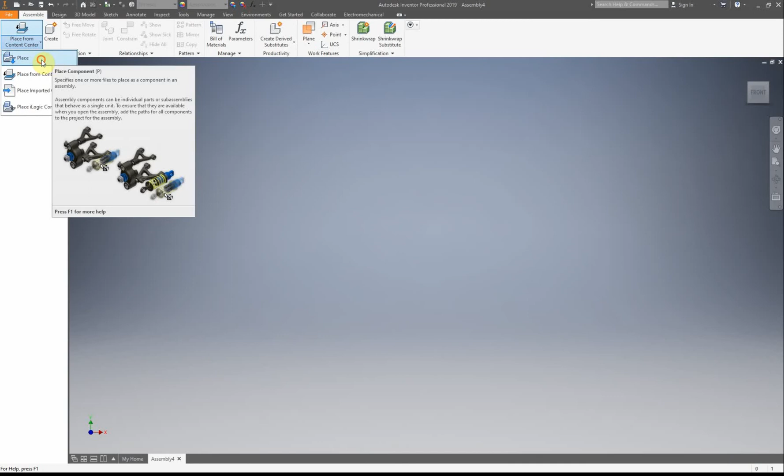Then you're going to find where you have your files. I have mine right here, so you can bring in your pieces. I'm just going to bring in the train body first. So I'm going to open, I'm going to place it in. And then I'm going to right click, OK.

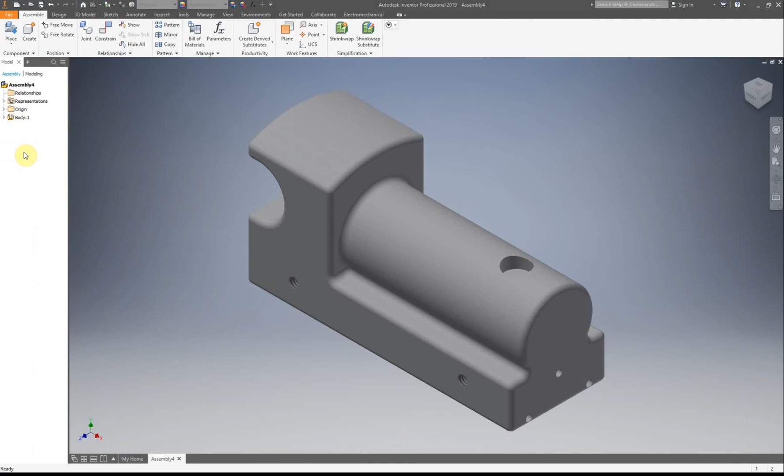The reason why I do that is if I click anywhere else, I'm going to place a duplicate. So before I have anything else in here, just so I don't make a mistake, I'm going to right click on it and ground it. What that does is if we look over here at our assembly, we can see that the train body, or whatever you called your file for it, should have a little tiny pin in the cube. So we're going to go to place.

Let's see, axle peg, we'll do that one next. I should have 4 of them. I'm kind of placing them where they're roughly going to go, just to make life a little bit easier when we're assembling. Okay, so right click, OK.

I'm going to go to place, bring in the next piece, cow catcher. Only need 1 of those.

So place, let's see, hitch magnet is my next one. Alright, I only need 1.

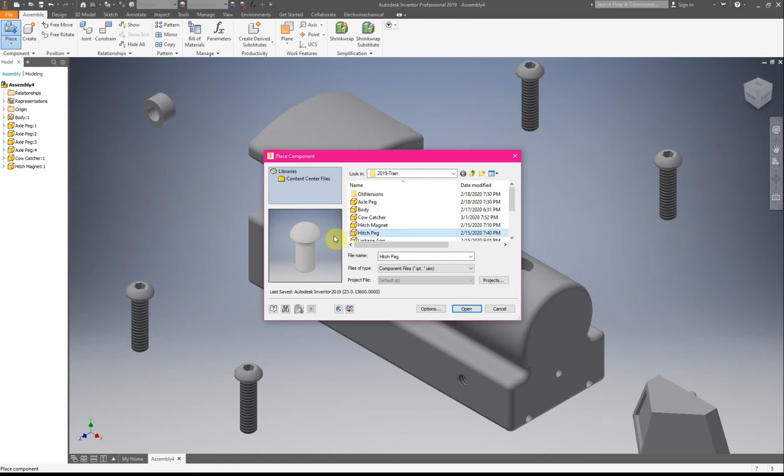Oh, okay, so you don't have to actually right click in there, okay. You can just click on place again. That's a neat update. Click open.

We only need 1 of the hitch peg. Make sure it looks like this. If it's the really tiny one, that's the linkage peg. So linkage arm, I need 2 of those.

Let's see, what's my next piece? Oh, there's the linkage peg I was talking about. See how tiny it is in comparison? So putting 2 over here, 2 over here.

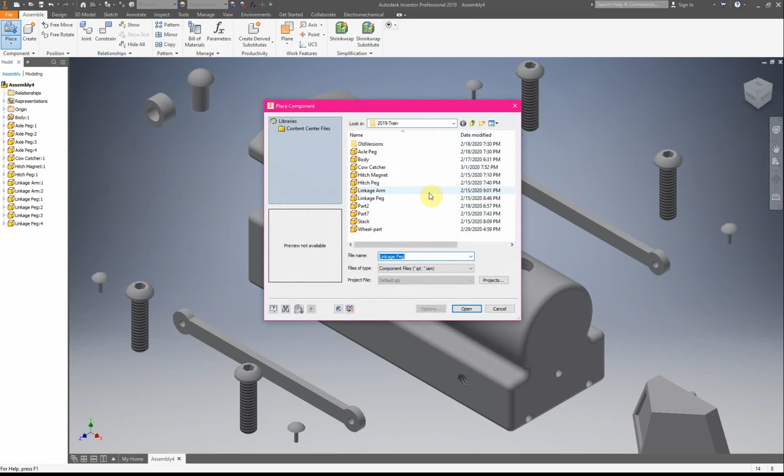Alright, let's see, stack. It's gonna go right here, but it doesn't look like it right now. And wheel, placing in 4 of those. Right click OK.

Let's see, do we have all the pieces? There should be 9 different pieces. So let's see, 1, 2, 3, 4, 5, 6, 7, 8, 9. Yep, looks like I got everything.

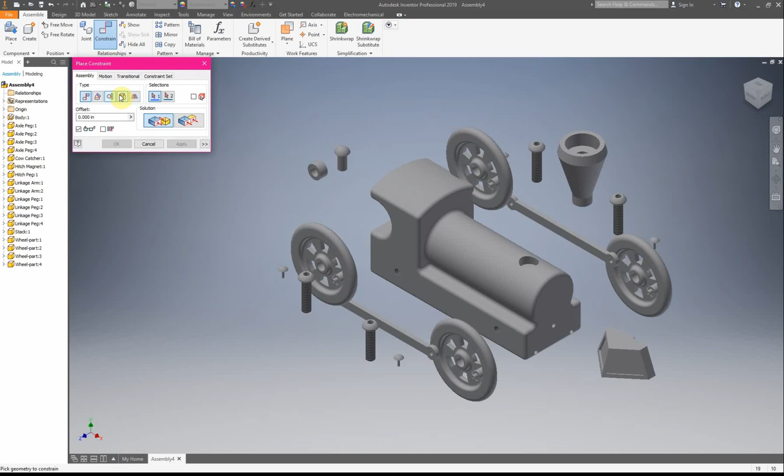Alright, so what we're going to do is click on Constraint. We have a few different options for this. This one right here is Insert. That's the one we're going to be using for like 99% of what we're doing today.

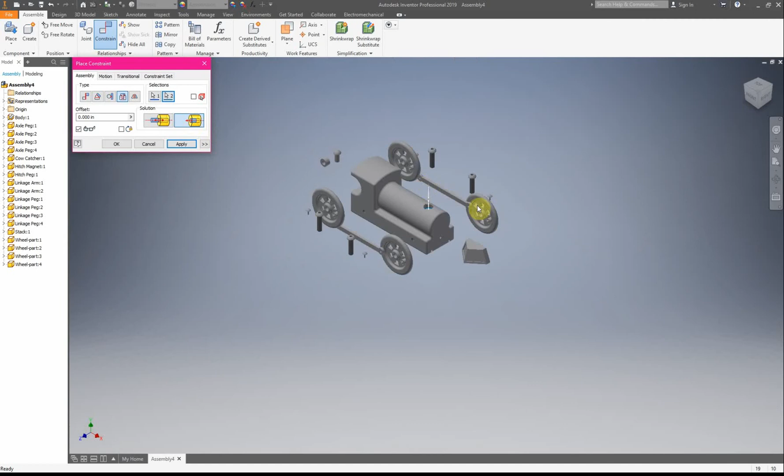So first thing, I'm going to connect our stack. I'm going to click on this bottom edge, and then I'm going to click on this bottom edge. Okay, mine turned out to be the correct way around, but sometimes it's not, and it does this. All you got to do is swap which way this is going, and then you can fix it.

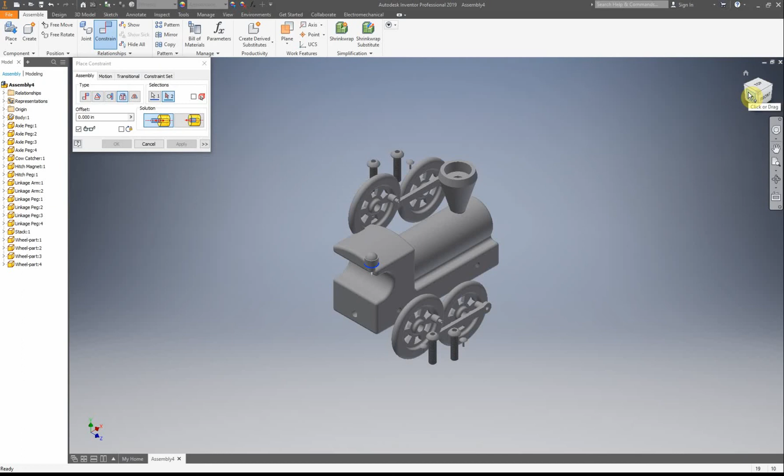Click apply. Okay, the next thing I'm going to do is connect the hitch peg and the hitch magnet together, and then I'm going to put all of it. Remember, you can use this little cube in the top right-hand corner to flip around your object so you can get to see it from better angles.

So I'm going to get on that edge and then right here. Apply. So I'm going to look from the top. See how this is lined up nicely?

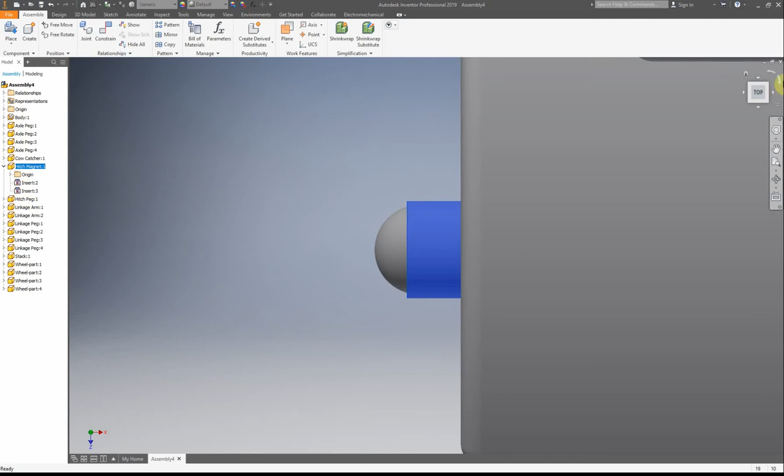There's no giant gap or anything. If there is a gap and you made a mistake, you could just undo it. What I like to do, since there are multiple of the same parts, is click on it first so it highlights blue, and then underneath model it highlights too. You can left click the arrow and see the inserts. From this view it's a little hard to see which one is which. Oh, here we go - if we get the blue off of it, you can see which one's which. If you made a mistake there, you could just right-click, delete, and it comes apart. So if you do make a mistake, it's very easy to fix. Okay, let's put that back together.

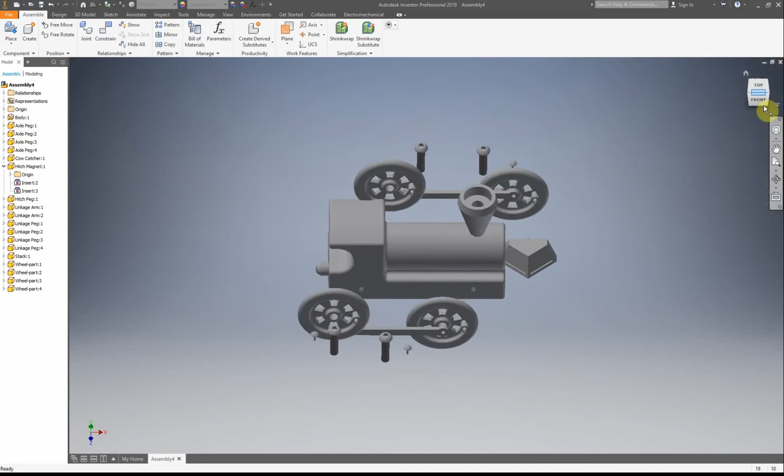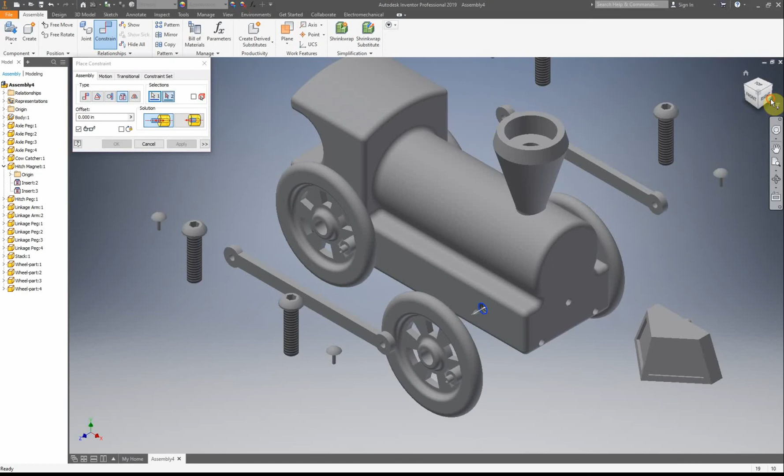Alright, our next thing, let's do the wheels next. I'm going to click on this edge right here and this edge. I'm going to do the same thing to all my wheels. It's easier to click on this one from this view. Make sure you click apply between each of these - if not, it's going to mess you up and it's not going to work. Okay, let's see, are all the wheels attached?

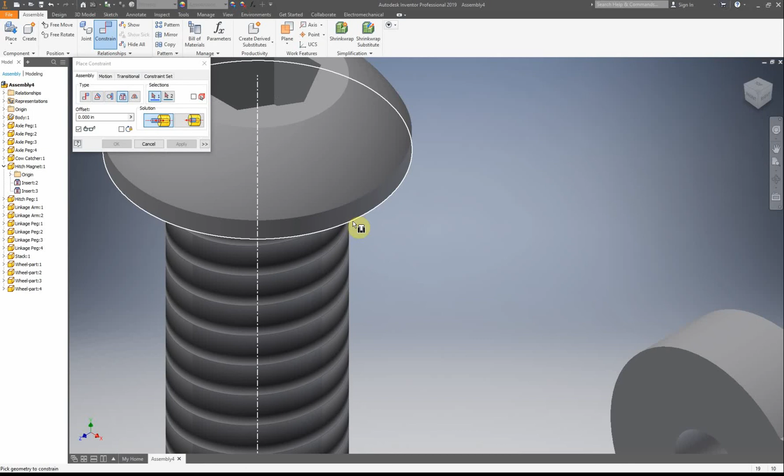Yes, they are. Next thing I'm going to do is attach the axle peg. On this, it's kind of hard to see what's going on because there's a lot going on, so I'm going to zoom in - that's way too far. So we have this top edge. That's not the edge I want to click on. You want to click on this one right here, or actually there's this tinier one in here. If I move the view, they're actually at the exact same level, so it doesn't matter which of these two you do, just as long as it's this edge right here or this one, so all along that edge.

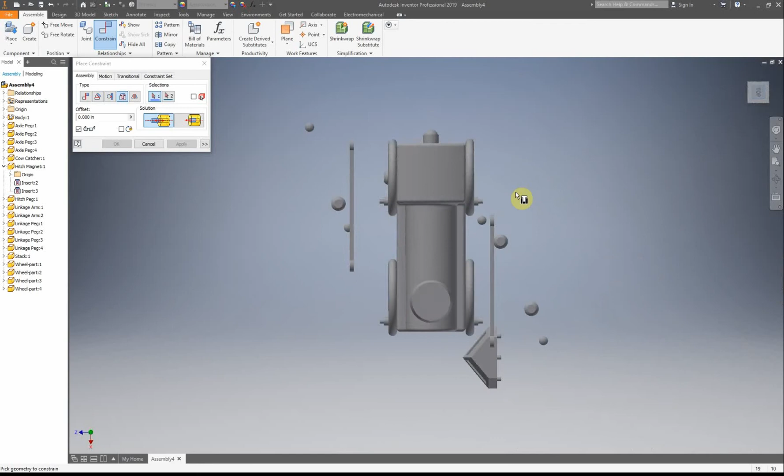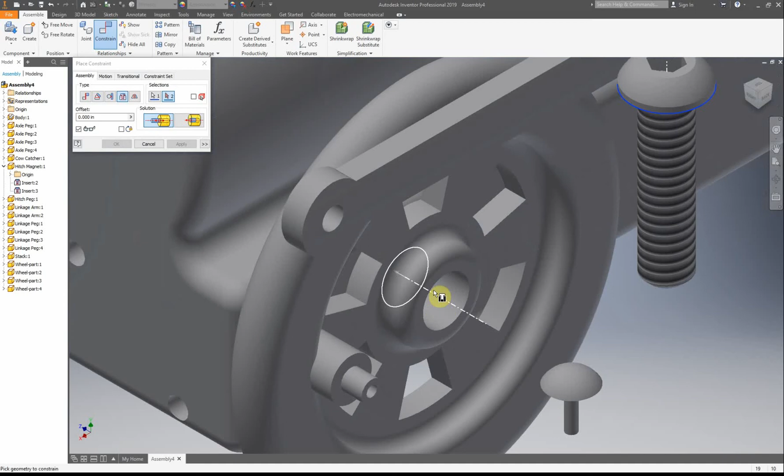Okay, clicking on my edge and clicking here and apply. I'm going to look from the top again. If I get close, you can see we have that little flat edge. If you don't have that flat edge, it means you accidentally clicked this edge and connected it with your wheel. I'm going to do the same thing to the rest of them. Oh, wrong one - you can see how much you need to move everything around while you're doing this. And if you zoom and lose track of where your part is, if you press home on the keyboard, it finds it for you again. I'm not the best at zooming, so I tend to lose it sometimes. Alright, so here's this one, and that one. Okay, that's all the axle pegs.

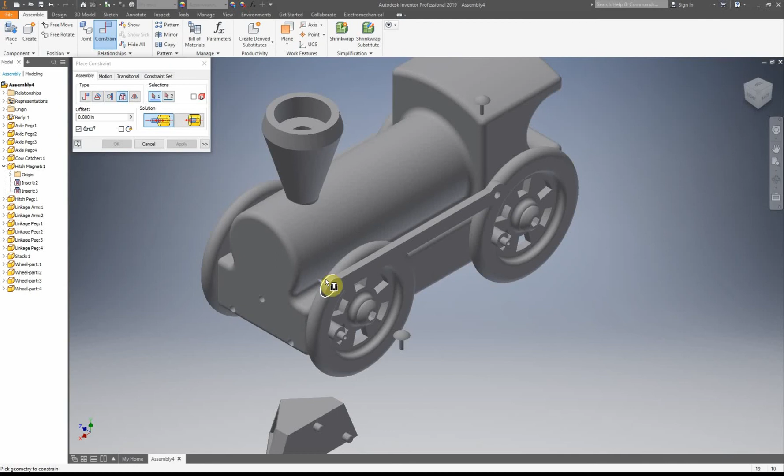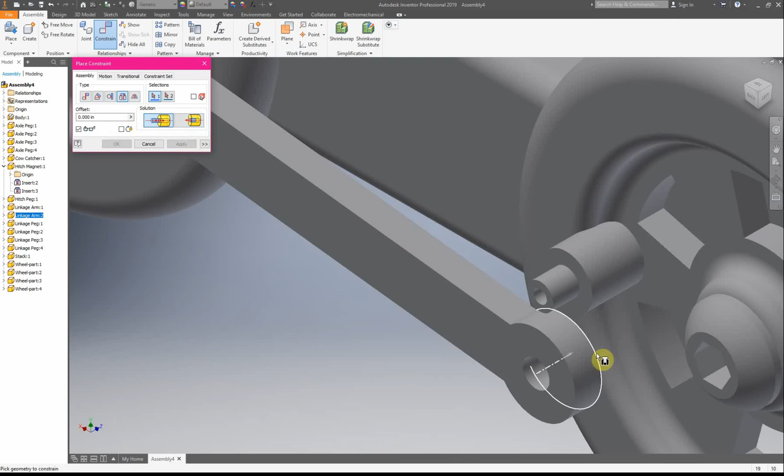Now we're going to do the linkage arm. I'm going to select this edge right here, and this edge, and click apply. The way I placed it in, it lines everything up and it looks connected right now, but it's not. If I take this and move it, you can see it's not connected, so we still need to connect. I'm going to now connect the back edge with the back edge. Apply. I'm going to do the same thing over here, so back edge - and you can see that it's not connected. I'm going to show you what happens if you do the front edge on one side and the back edge on the other.

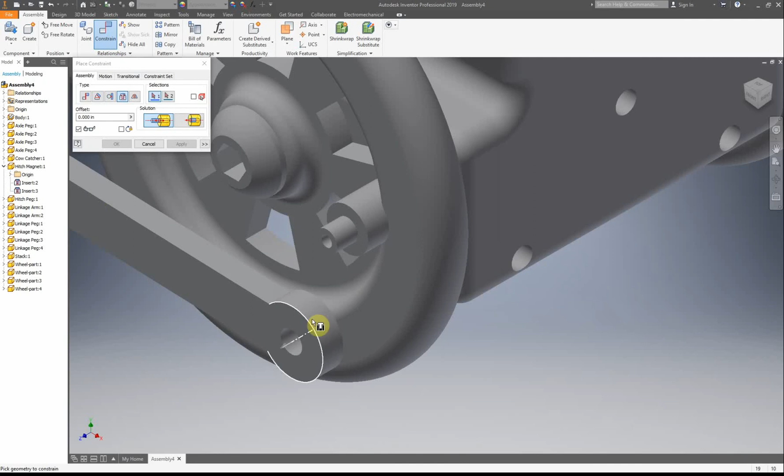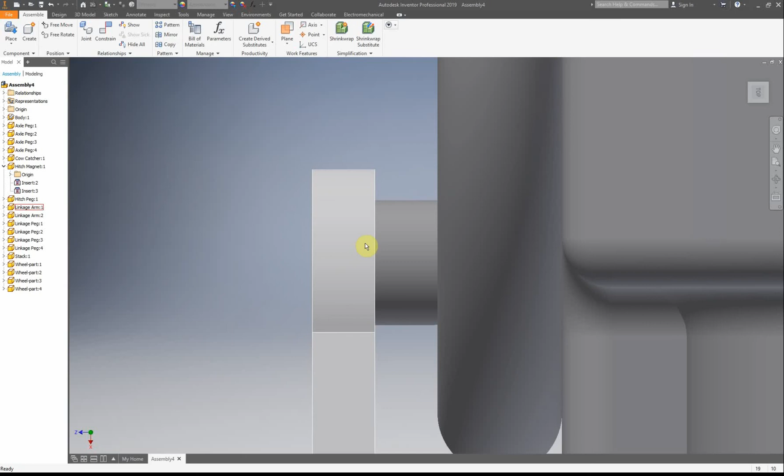You get an error. The reason for that is it's trying to line it up perfectly on the exact same plane. So if you pick the front edges for the first one and the front edges for the second side, you're fine - both work just fine. But you've got to stick with either the back for both or the front for both. Either one is completely valid. So we're going to look down from the top again. You can see right here we have this edge, and then our wheel. If you have an extra piece in there where this chunk is sitting out more, and there's a little tiny narrow bit, that narrow bit would be this piece, and you want that going inside of your linkage arm. If it's not, then you just need to fix it - undo it and then put it back in.

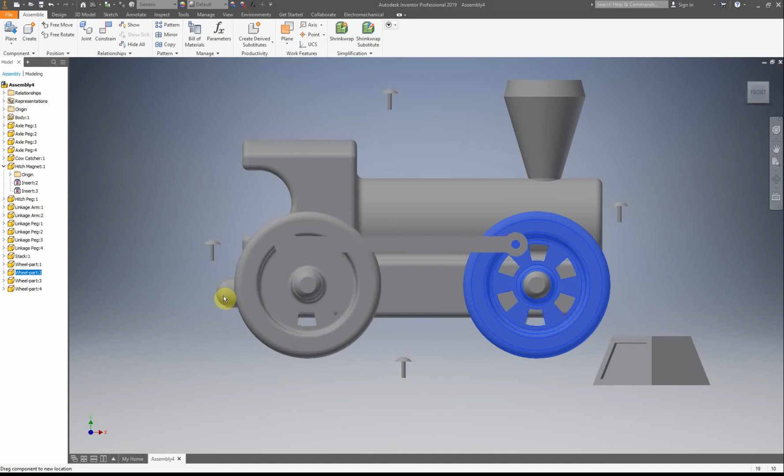Another way we can do some checking is to make sure this is moving around. If your wheels are doing this just fine, that means your linkage arm is the correct length. Sometimes it gets a little wonky, but if it goes diagonal and gets stuck that way, that means your linkage arm is too long. All you have to do is go back to your part file and make it the correct size.

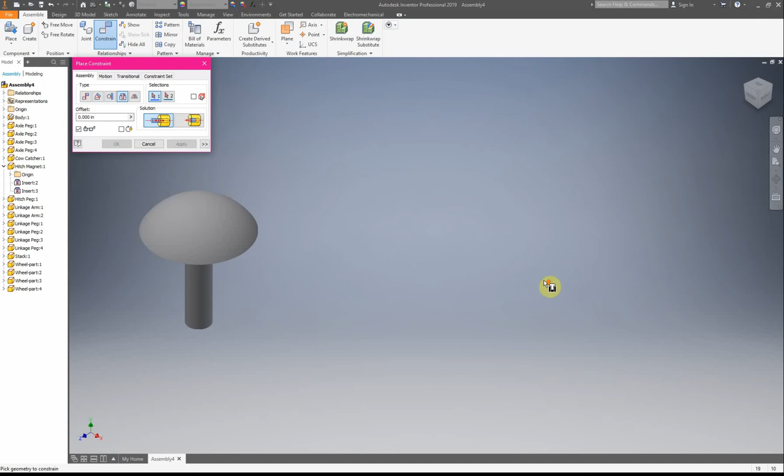The next part is our little linkage pegs. Just like for our axle peg, there's two different places you can click, on this edge or this edge right here. Doesn't really matter which one, and then apply. These are like little caps so our linkage arm doesn't fall off.

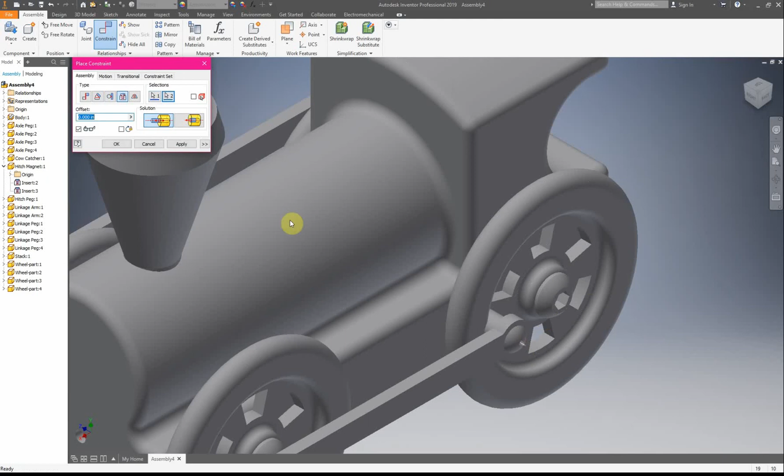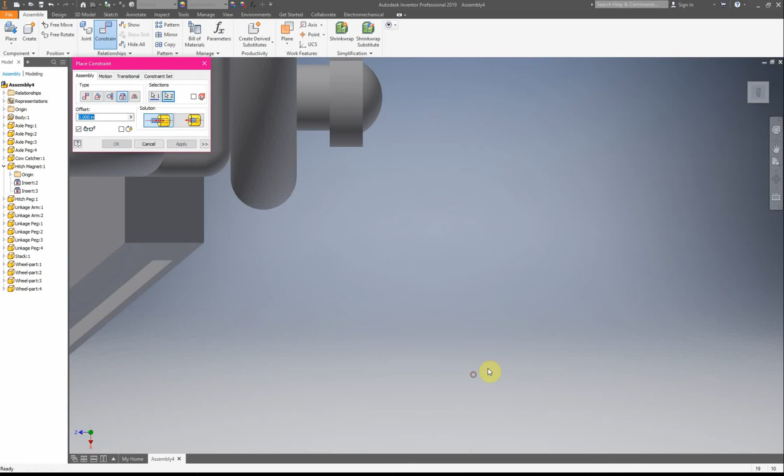So those are now all in place. The last piece we have is this cow catcher. If you did all the dimensions properly, it's super easy to attach, and I'm going to show you how. First we click on this top circle, and then for this one we need to go right up against this edge, looking down, and apply. Right now it looks like it's connected, and it is, but if I spin it around in circles, I'm going to show you two different ways to connect this.

One way is a little bit easier than the other. I'm going to show you the harder way first, then undo it, and then show you the easier way in case the hard way doesn't quite work out.

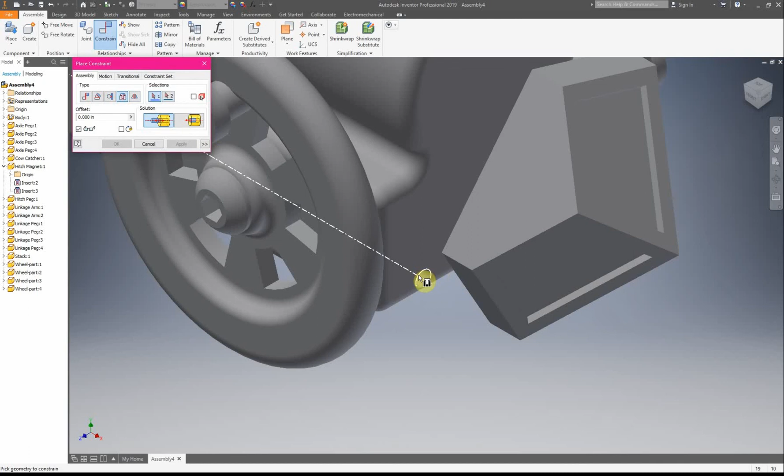I'm going to use the insert constraint. I'll click on this edge right here, and then click on this edge, and then apply. You can see how it's all lined up, and because I have both of those done, it's now locked in place. You don't need to do all three, just two of them.

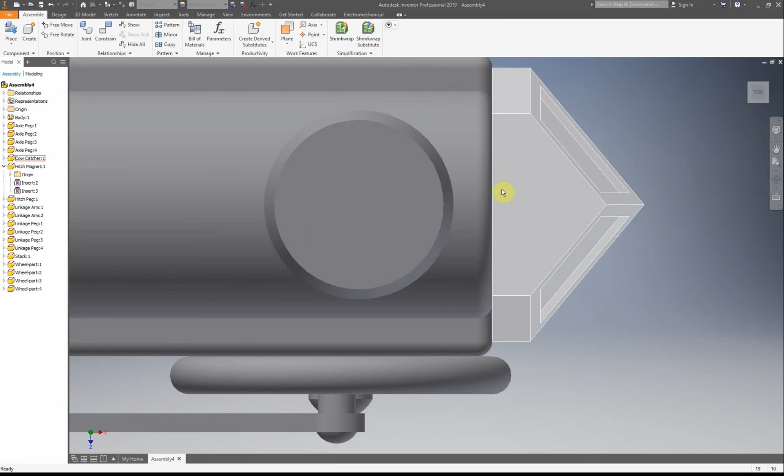If that isn't working, typically the reason is you're either not clicking on the correct parts. You can see how this is nice and flush right there, the two pieces are touching. You might have accidentally clicked the wrong edge, or your dimensions are in the wrong spot. Something's just not quite working properly.

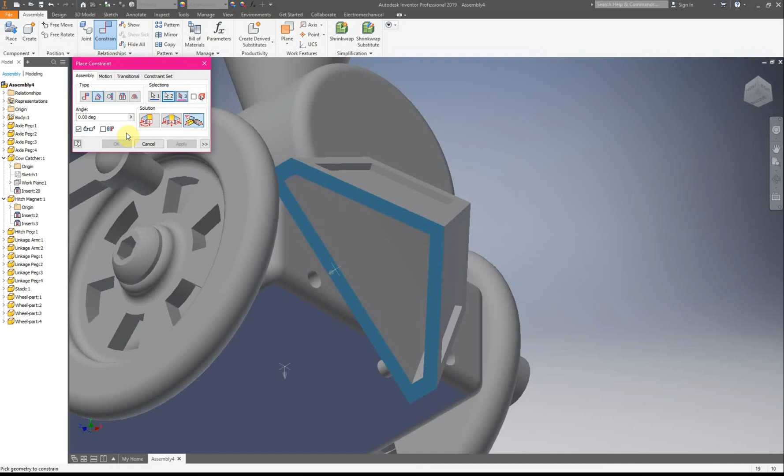The way we can fix that is, I'm going to delete that last insert so you can see it can still spin around. A way we can kind of fix that or get around it is by constraining this bottom edge and this bottom edge with an angle constraint. The angle constraint is just saying I want the two planes to be at the same angle, since it's 0 degrees. I'm using this first solution here, the directed angle, and then I'm going to click apply.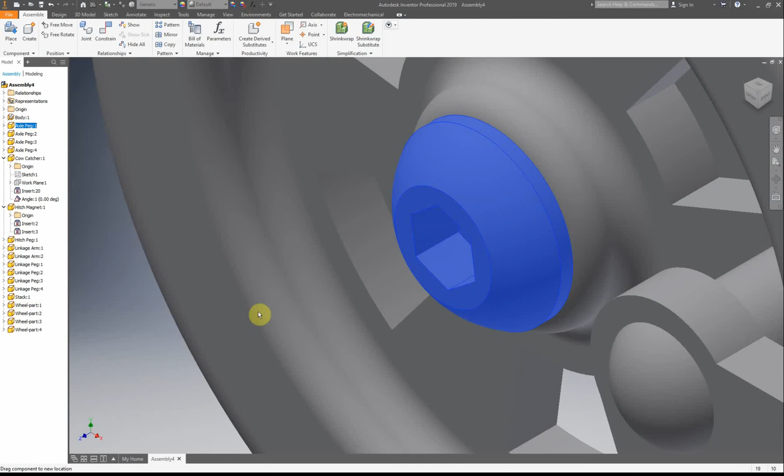Now when you look at the train, that doesn't go anywhere. We can do a little wiggle test to make sure everything's connected. Those kind of wiggle around how they should. This is actually kind of neat, if you look at it, it's actually spinning around, so it is connected exactly how it should be. This is just fine, basically it just shouldn't slide out of place. Spinning around is just fine. So our little train is now fully assembled.

Again, here is this back portion, this is how this should be. Some people forget this at the end, so make sure you have all the components of your train connected.